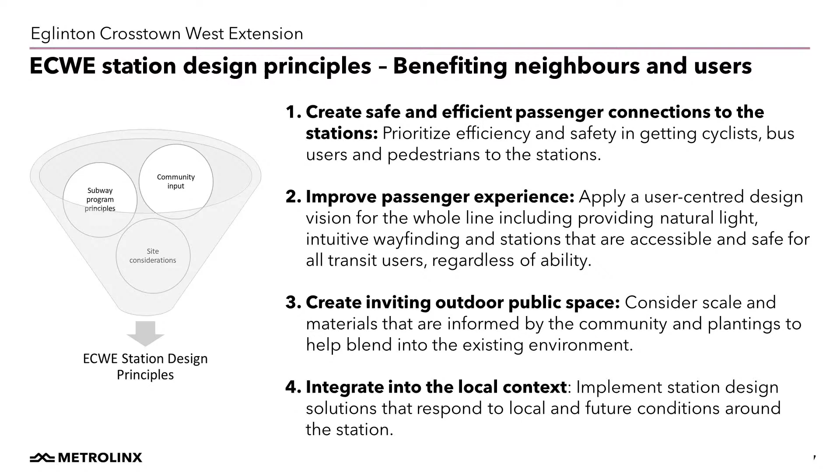I'm going to pass it on to Omid from our technical advisor team to talk about the station design principles. Thanks, David, and thanks to the community for giving us this opportunity to present the design of elevated stations today and seek feedback. In this slide, you will see some of the design principles we've utilized on this project on Eglinton West, which we also explained for the underground stations presented a couple of months ago. These 4 principles are coming from...

Creating a safe and efficient passenger connection to the stations as much as possible. We're trying to make sure we have good connectivity with cyclists, bus users, and pedestrians to the station, in particular bus users, as they provide almost 80% of our passengers coming to the stations. We're improving passenger experience as much as possible, applying a user-centered design vision for the whole line.

We're trying to make sure we provide natural light wherever possible, with intuitive wayfinding and a very streamlined design, so that passengers' routes from the station's external spaces all the way to platforms are legible and user friendly. We're designing all stations to be fully accessible and safe for all transit users.

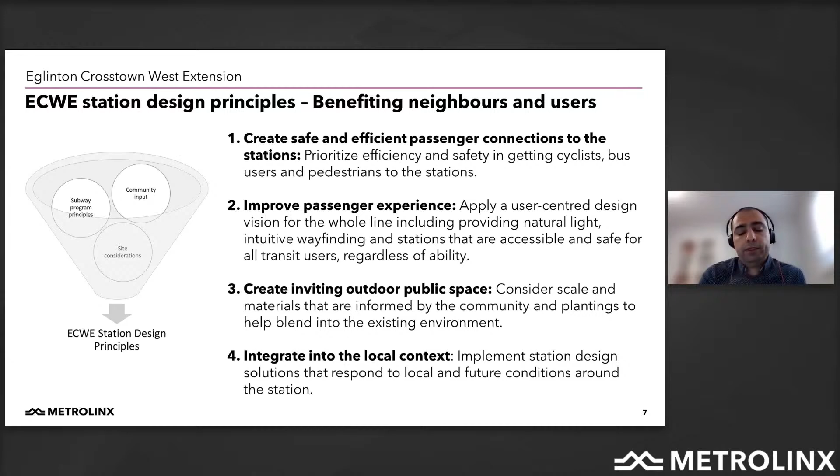All of our station designs are also trying to accommodate and future-proof for what's going to happen around the stations and future conditions. You'll see in the case of Jane Station how we have future-proofed for a future LRT around Jane Station. Next slide, please.

So, just again to recap how we try to respond in the station features to some of these principles. In the case of creating a safe and efficient passenger connection to the stations, we have...

Designed curb cuts to improve pedestrian safety around the intersection. We have modified the bus stops around each station and moved them so that the passenger connection from the buses to station entrances are optimized as much as possible. We have provided bus laybys where possible.

We have created bike rack allocations around the stations based on the Toronto Green standards we have been using. And also we have tried to make sure that ancillary and emergency buildings are located such that they help with the overall passenger experience.

In terms of improvement of passenger experience, we have redundancy of elevators for all the stations. Each station will have 2 entrances, less than 100 meters away from each other, and each station entrance will have 1 elevator, achieving redundancy through that.

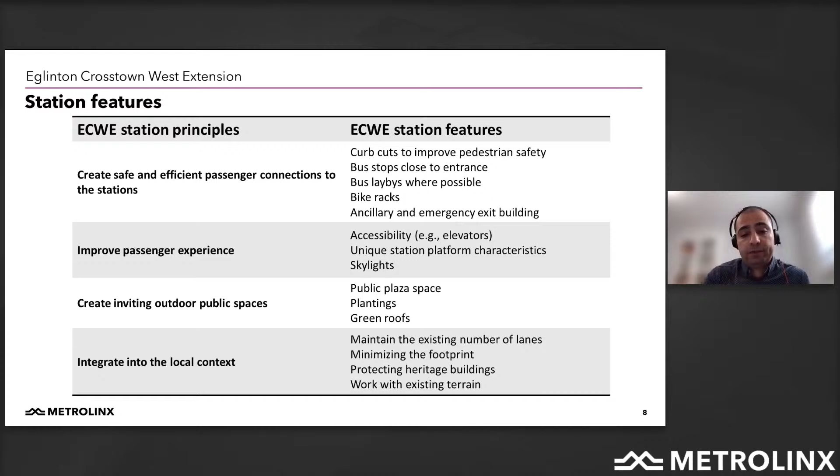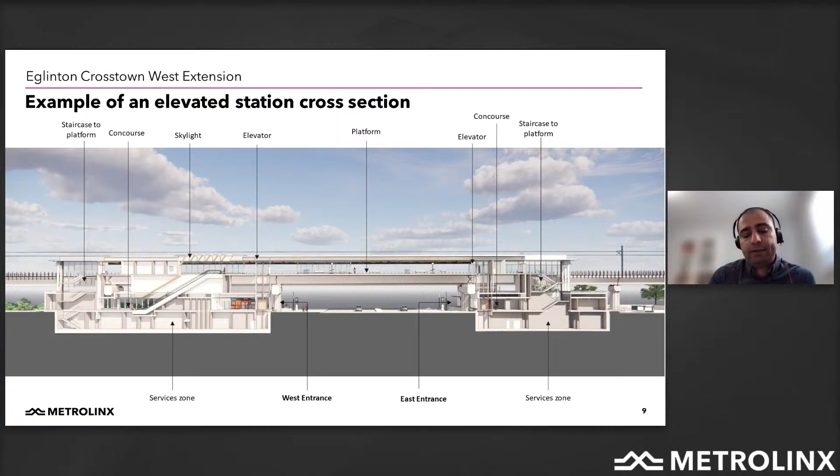At platform level, the designated waiting area and shelter are designed to provide relative thermal comfort, especially during harsh winter weather. When passengers are at the platform, they have a very spectacular view of Eglinton Flats from both sides. Next slide, please.

So this slide shows the Scarlett station, which in principle works the same as the previous slide, which was Jane Station. Scarlett Station sits on the northern side of Eglinton Avenue where it intersects with Scarlett Road.

On the northwest side, we have located the main entrance, and to the north of that main entrance we have the Richview neighborhood and towers. We have tried to work with the alignment such that we provide most of this station's amenities on the northwest side of the intersection, minimizing the impact on the eastern side while still providing the required connectivity and vertical circulation for passengers coming from the south and getting off at the bus stop on the northeast side.

We also provided integrated connectivity from the Richview neighborhood through walkways, ramps, and stairs, connecting the adjacent neighborhood all the way back to the plaza in front of the northwest entrance, ensuring a seamless connection to the station. We've also provided a connection on the western side to help with overall connectivity toward Eglinton Road.

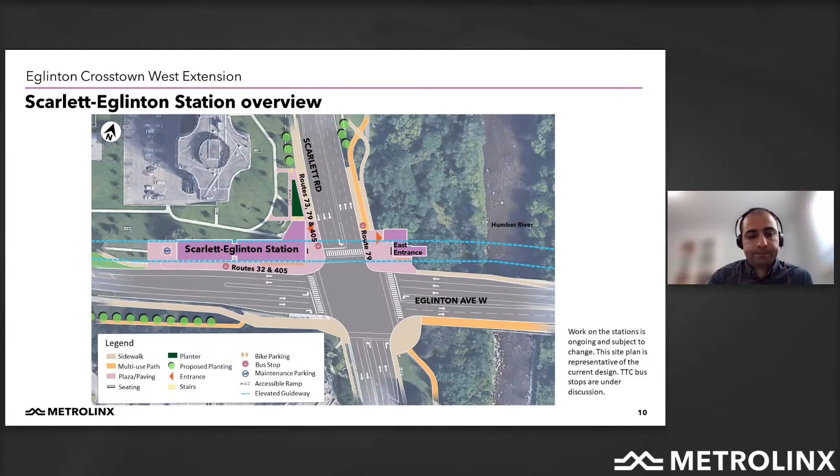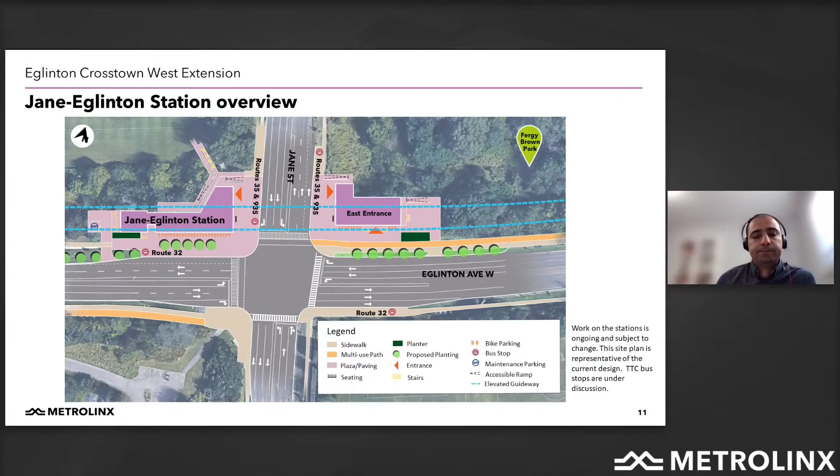Now I'm going to give it to Aman, my colleague, to take you through the surveys.

So you'll notice that we've separated the next couple of slides by the sections that were presented in the elevated section survey. The first was design principles.

In this question, participants were asked to rank 5 design principles for the elevated section according to how important they were. Most respondents ranked the principles of minimizing visual impacts and protecting parkland and recreational spaces as most important or important. On this graph, you'll see that minimizing visual impacts and protecting parkland are the bottom 2 bars, and they were the top 2.

Mitigating environmental impacts, which is the 3rd bar, was number 3. Improving connectivity was number 4, and improving the public areas around the elevated section was least important among these 5.

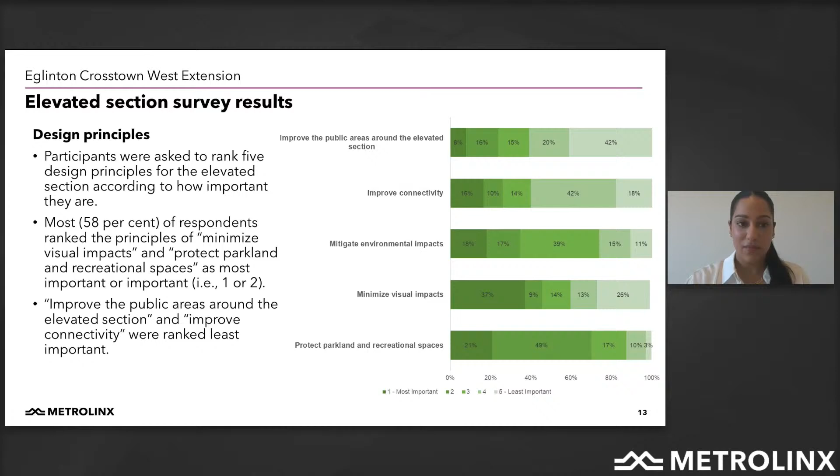Thank you. So this section here is portals.

In this question, we asked participants for their perspective on 3 opportunities for enhancing the walls around the portal. Opportunity 1 is keeping the glass wall at the portal clear to provide an opportunity to view the trains. Opportunity 2 was adding a pattern to the transparent panels that carries a symbolic meaning. And opportunity 3 was keep or add vegetation in the area around the portal where possible to make it blend into the green surroundings. As you'll see here, respondents rated opportunity 3 very highly.

73% ranked it very appealing, showing a clear preference for planting vegetation in the areas around the portals. There was some support for having opportunities to view the trains and patterned glass, with just under 50% of respondents ranking these opportunities as very or somewhat appealing.

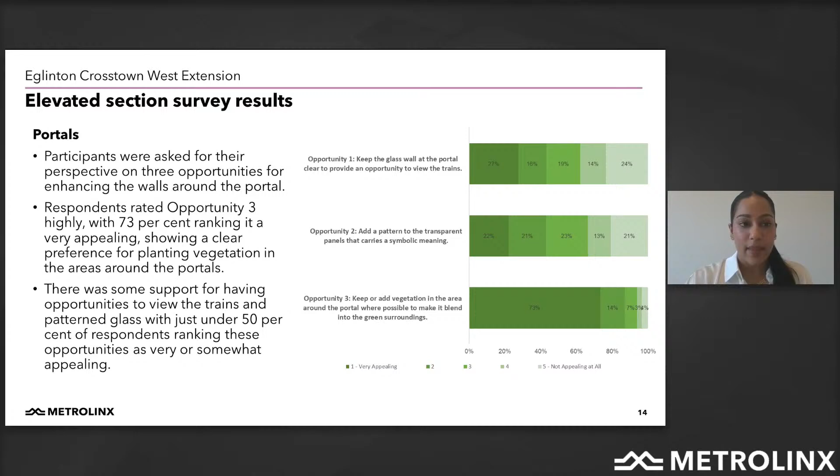In the next slide, you'll see the options here again, the images that go with them. Option 1, keeping the glass at the portal clear. Opportunity 2, adding a pattern. And opportunity 3, which was the most popular, was keeping or adding vegetation.

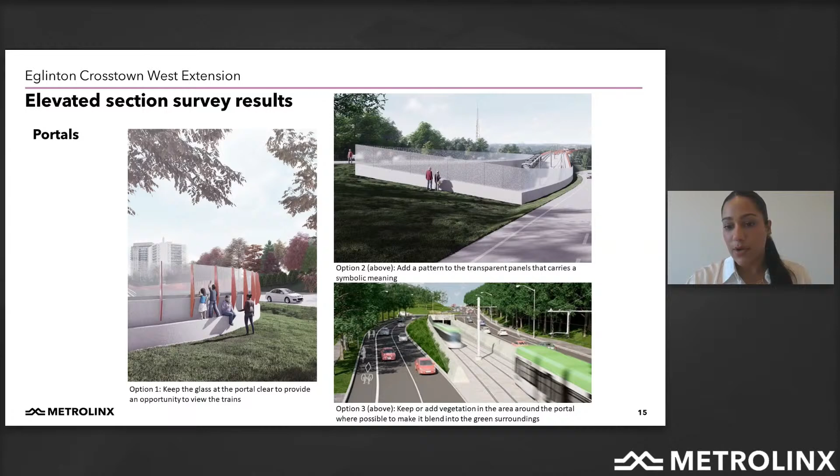This section here is for the guardrail. We noticed for this section that a majority of respondents supported the guardrail strategy. Some specifically liked the color and the height of the guardrail. They liked that the height provided for safety and an opportunity for passengers to look out.

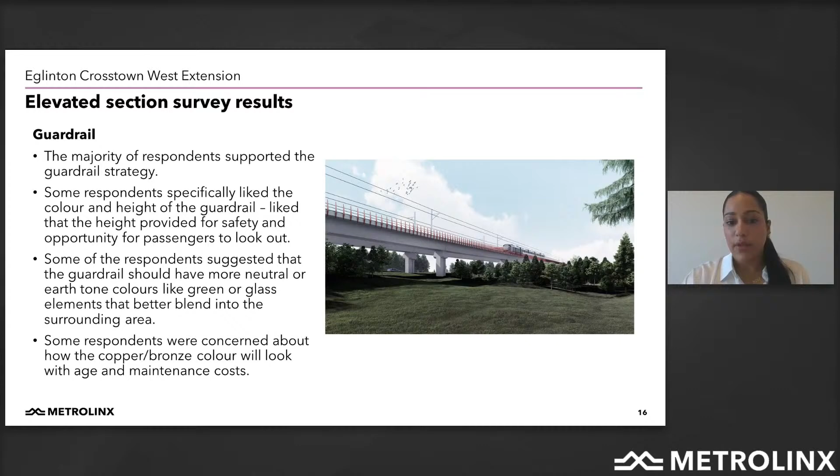Some suggested that the guardrail should have more neutral or earth tone colors like green or glass elements that better blend into the surrounding area. Some were concerned about how the copper or bronze color will look with age.

Here we have lighting. We noticed that a majority of respondents supported the lighting strategy, though some did not prefer the red displayed in the rendering, which you see in the image below. Many respondents suggested that there should be light underneath the guideway to provide safety for pedestrians and cyclists.

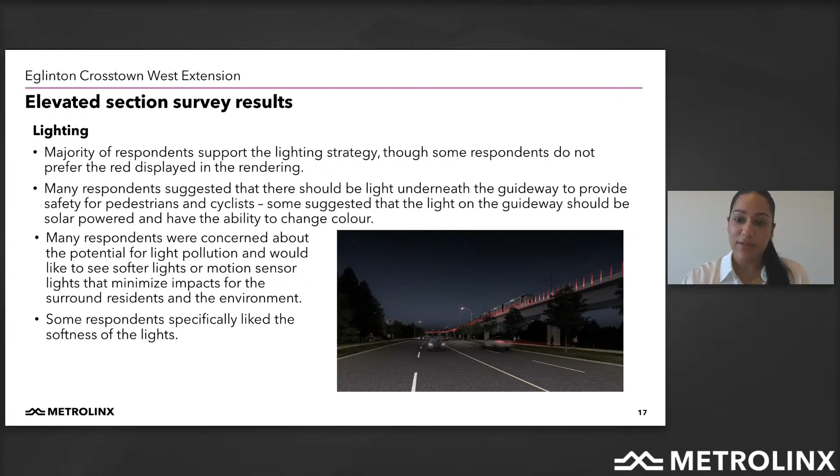Some suggested that the light on the guideway should be solar powered and have the ability to change color. We also had respondents concerned about the potential for light pollution who would like to see softer lights or motion sensored lights. And we also had some respondents who specifically liked the softness of the lights.

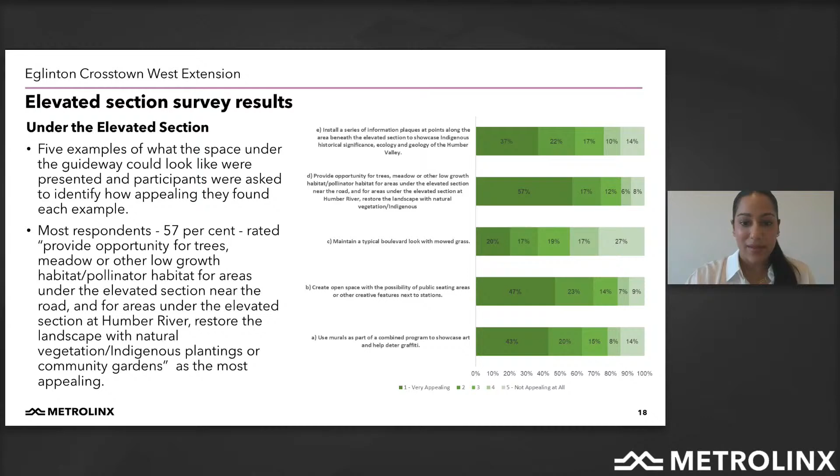So with this survey, our goal is to create an elevated section that is welcoming and suited for the surrounding area, which is why we're so thrilled to have your input and to present this back to you today. This isn't the end of the engagement. The input obtained through this survey will be taken into consideration as the detailed designs for the elevated guideway are prepared, and we will come back to engage the community on a renaturalization strategy at a later date. And of course, we continue to work with Toronto Parks and Forestry and the TRCA to ensure that park access and active uses of the park are maintained throughout.

And of course, if you didn't get an opportunity to participate in this elevated section survey, we're still here. So if you have any input, feedback, questions, or concerns that you'd like to let us know, there will be a slide at the end of this presentation with our contact information. But you can email us anytime at eglintonwest@metrolinx.com. And I'll turn it over to David.

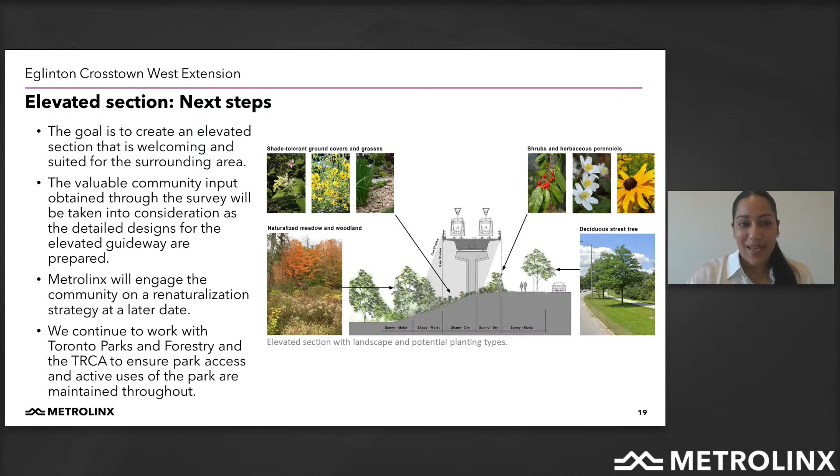On the next slide, we've got a final section as part of our presentation this evening to follow up on the elevated stations and the elevated guideway survey. There's some feedback and reporting back to the community on a couple of the smaller design elements as part of the project. So on the Fergy Brown Park access road, we engaged over the past year with the community and with our colleagues at City of Toronto Parks and Forestry and Transportation. We were advised on a requirement to modify the access road that currently provides access into Fergy Brown Park and the Eglinton Flats area. So as part of the construction, there's going to be a change to that access road.

Some of the feedback that we heard with respect to the access road was prioritization of maintaining park access at all times, attempting not to segregate the park from Pearen Park, so continuing a healthy connection between both Fergy Brown Park and Pearen Park, overall construction coordination amongst the projects. There's a lot of active construction and a lot of projects happening in the Mount Dennis community. And then mitigating noise and impacts to park users through the duration of construction and operations of the line.

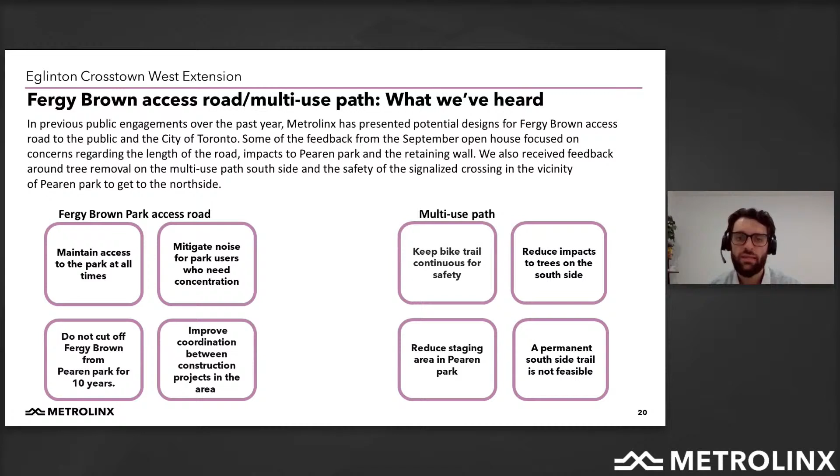So with that being said, that's a summary of what we've heard to date, and I'll pass it over to my colleague Henry to take us through the next sections of the presentation and how we've aimed to address some of these concerns that we've heard from the community so far.

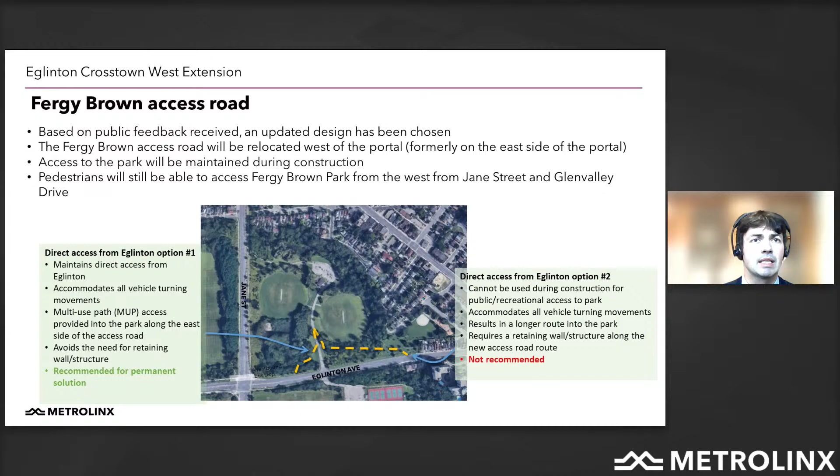The other topic we've heard lots of feedback on is how we maintain good cycling and active mobility connectivity through the corridor throughout construction. In order to enable construction, the multi-use path and sections of the sidewalk on the north side need to be closed, and the approach developed is to create a continuous bi-directional cycle track on the south side of Eglinton all the way through from Jane Street to Black Creek Drive. This connects the existing south side multi-use path cycle route west of Jane all the way through to the multi-use path being implemented by ECLRT east of Black Creek.

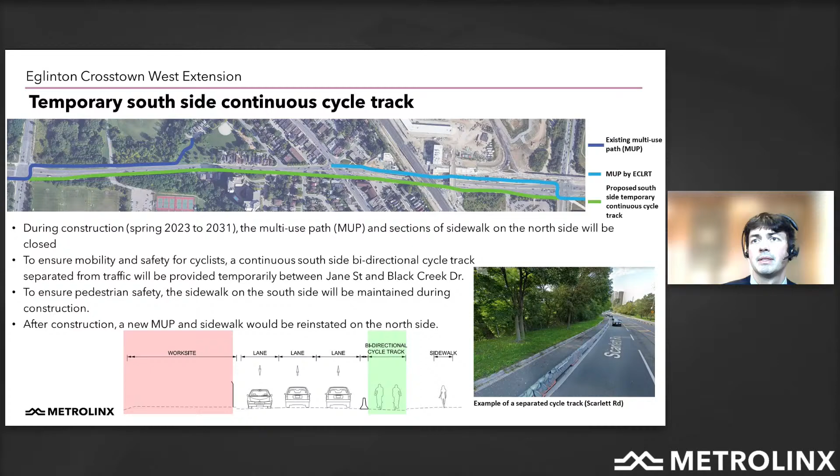A key part of the work on the project has been understanding how throughout construction we can ensure that traffic remains moving and Eglinton remains a working street. That isn't just for cars, it's for transit, bus stops, pedestrians, active mobility, and cycling. We've taken a full analysis approach to looking at all those different modes, understanding how they may be impacted, how we can minimize those impacts, and what we can do to keep Eglinton moving as well as we can.

Similarly, in section 2, just east of Scarlett, also to help build the station, the north side will be closed. There will be some lane reduction, but across this whole section bus stops and transit facilities will remain, and the south side MUP will remain. Through section 3, the impacts are limited, but primarily there'll be a north side sidewalk closure. The road will remain in its current configuration, and the MUP on the south side will remain.

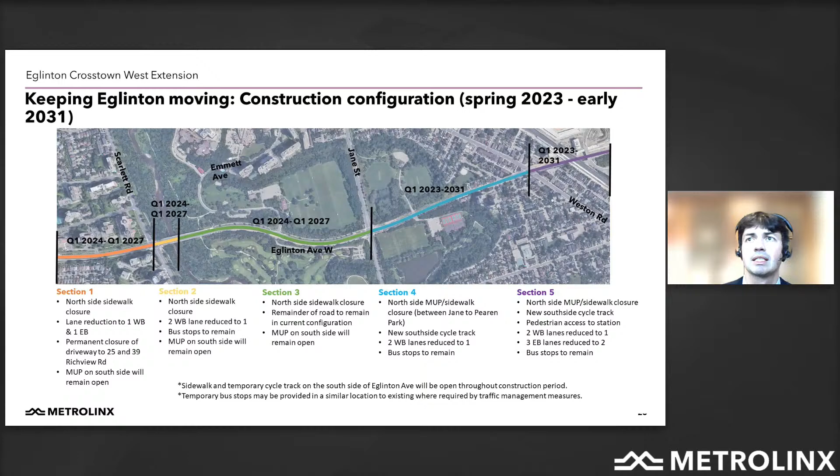To highlight those key elements again: keeping a continuous sidewalk on the south side of Eglinton throughout all construction stages, creating a continuous cycle and active mobility corridor east-west along the same route through all stages of construction, so it's clear for the community throughout the period of construction, minimizing lane reductions, and continuing to listen to and understand community feedback throughout these stages.

We've been working closely with the City of Toronto throughout this stage, both to explain the potential impacts and to hear their feedback and adapt our plans in response. Working with City of Toronto staff, we'll be bringing plans to City Council this summer that articulate these long-term plans.

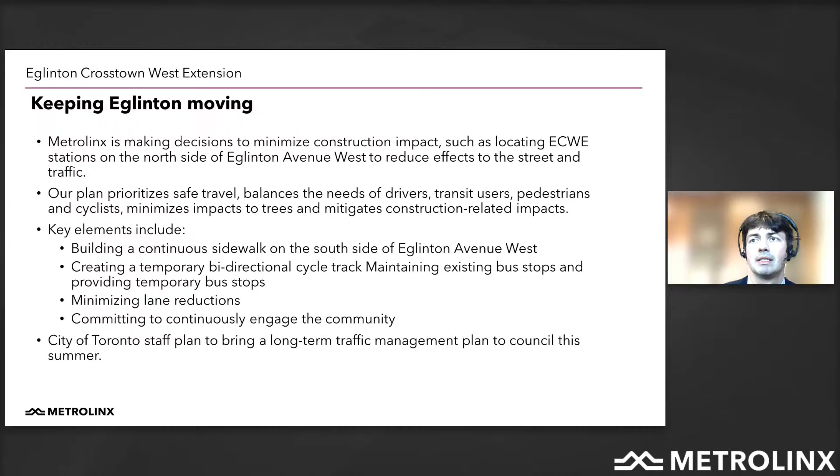Another area that's been important for stakeholder and community feedback relates to the driveway closure of the properties at Richview. As presented previously, as a result of the portal and the structures where the tunnel comes out of the ground, the existing driveway does need to be closed.

We've looked at a wide range of approaches and options to ensure that residents of that property can still access the wider road network adequately, and that impacts on that wider road network are minimized.

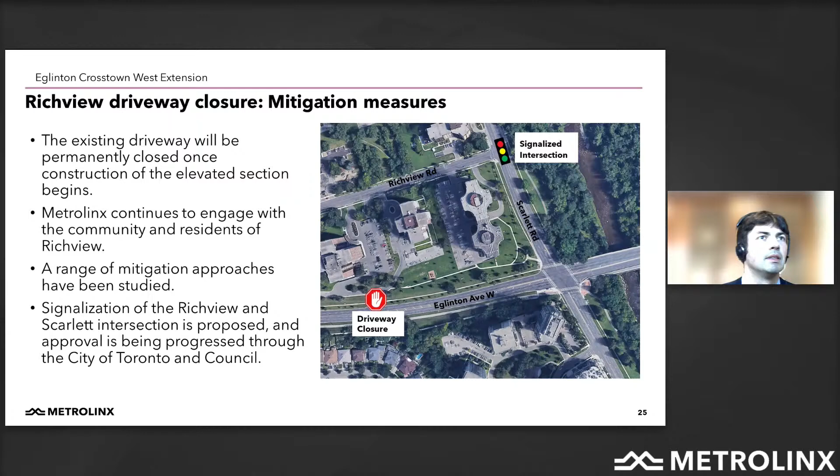Thanks, Henry. As we wrap up here, we really appreciate the feedback and support we continue to receive from the community—a lot of good questions, good challenges, and effort on the project side to respond to that feedback, such as the Fergy Brown Park access road and the multi-use path solution we've figured out. We're encouraged and continue to be encouraged by the feedback we're receiving.

We'd appreciate ongoing feedback through the poll on the Metrolinx Engage website right now about the station design principles and features, which will be up for the next month or so. We'll continue to input into the design once we hear back from the community on those station design features we've shown so far.